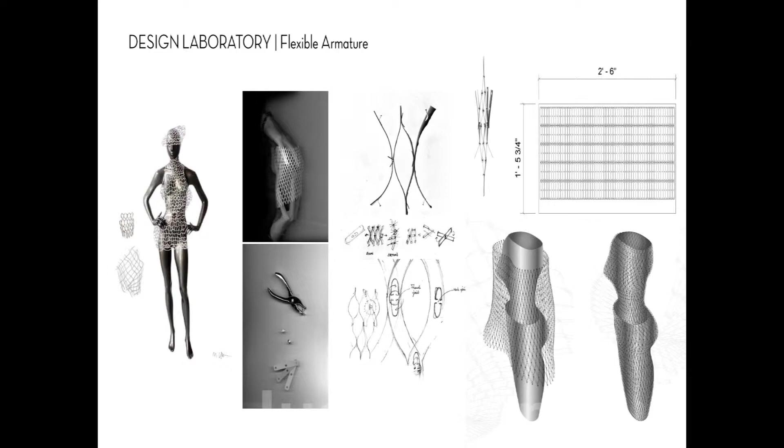Recently, we worked on a flexible armature project in which we took the idea of flexibility in which skin can be readapted to different human body sizes. And it was featured in a fashion show where different models tried on different dresses, and it still maintained the same aesthetic appeal.

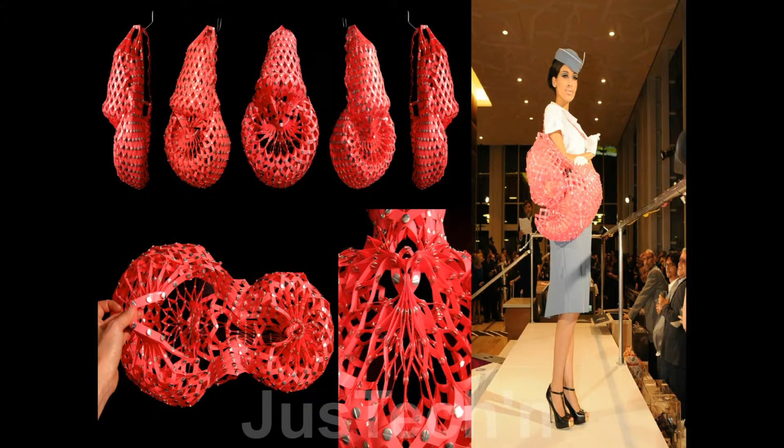With the success of the dress, we were asked to design a travel sack. And normally when you travel, you carry multiple bags, but with this sack, we were able to contract and expand to different needs of the project.

All of that was scripted and put into an algorithm, as you see up there, and produced a result that went through several iterative processes. The end result is what you see up here, which is a cultural motif in which we mutated and distorted to provide an interesting array of ideas.

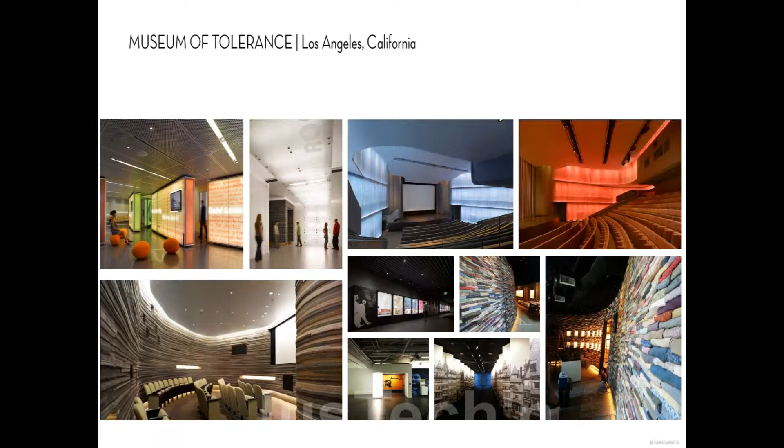At a much smaller level, we took the same idea of patterning using simple materials such as felt and articles of clothing for this exhibit at the Museum of Tolerance for Anne Frank.

And then for another project where we took the idea of flexibility and turned this curved glass wall that can be reconfigured to any size depending on the users and demonstration purposes.

The project I'm going to be talking about in more detail is called CJ Only One Research and Development Center. For those of you that don't know, CJ is one of the largest conglomerates in Korea. They're leaders in entertainment, and they actually hold majority stake in DreamWorks.

They're also leaders in food, biotech, and pharmaceuticals. We were asked by the client to create a large single complex in which three divisions, biotech, healthcare, and food, would be located in one location. They all wanted to move from different parts of the country to a single location where creative collisions could occur. We achieved this by creating three different unique towers brought together by a single atrium with collaborative roof gardens and landscapes that tie them together, creating a space for informal conversations and ideas.

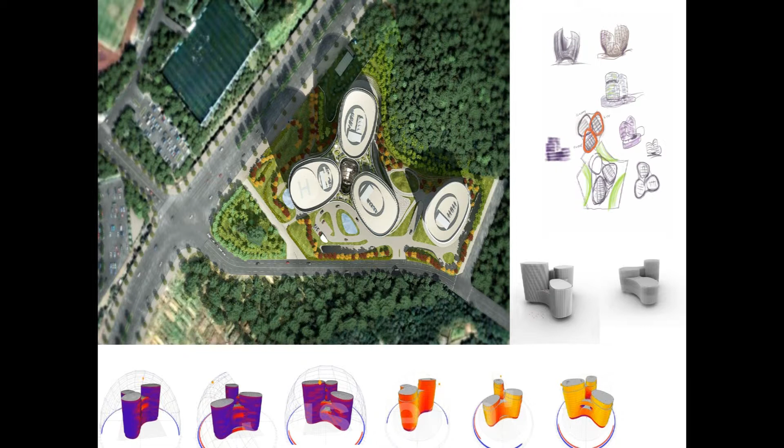So as I mentioned, the three towers represent biotech, food, and pharma. We never really intended it to look like the logo, but through the process we were inspired by it. At the same time, we had to rigorously test whether the idea was valid. You can see at the bottom the skin being exposed to solar elements, providing shade and performance to the building.

On the outside, when these creative collisions are occurring, the aperture of the facade actually opens up. So from the exterior, when you see these openings, that means there's a meeting room, conference room, or some type of collaborative space occurring.

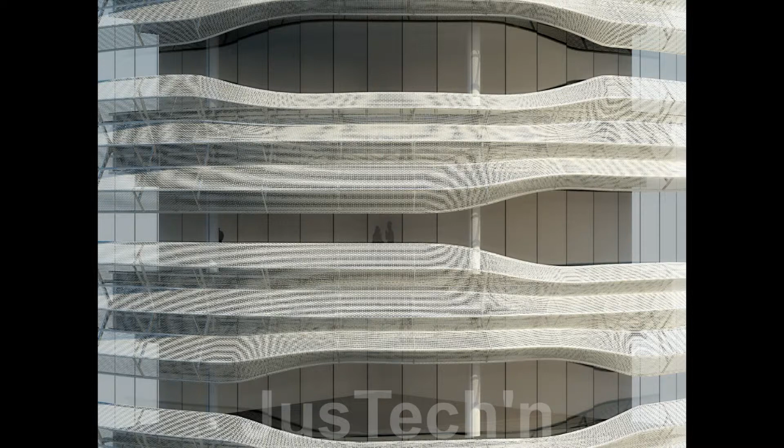Looking at it in more detail, the perforations you see in the facade actually change depending on orientation and sight lines. So if it's on the north facade, the perforation sizes change. The result is a panoramic view without any mullions, giving a clear sight of what they're doing, what they're seeing, and what to be inspired by.

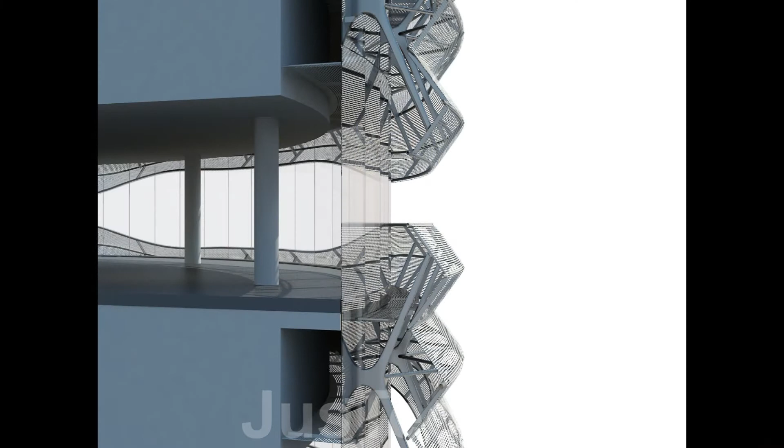We achieved this by creating a special strong-back system in the ceiling, which allows us to span between the columns without any mullions and have clear glass. None of this would have been possible without tools like HP Workstations in our daily process.

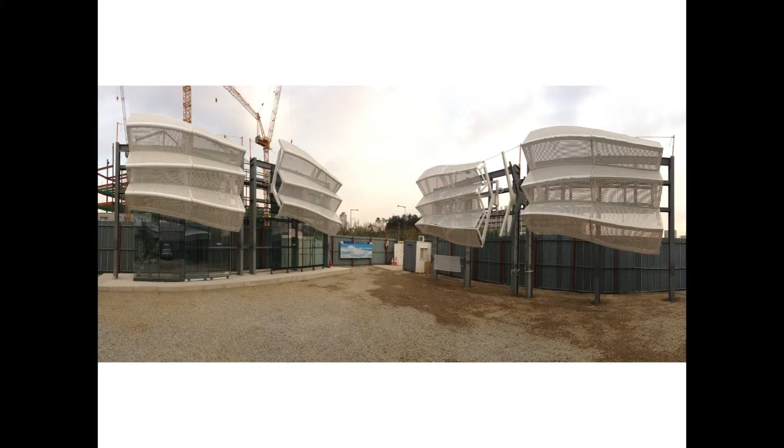We've gone through several iterations, going from one workshop to the other, showing different processes and ways of presenting this model. The result is these four mock-ups that were done recently. Having done a lot of studies and tests ahead of time, we're able to virtually mock up the entire thing digitally and test how it fits on the site.

Unfortunately, unlike a digital world where everything fits in perfectly, what you don't see here is there's a guy behind that screen hammering things, because in real life things never work out as perfectly, like my mic. And this is the final piece, the context.

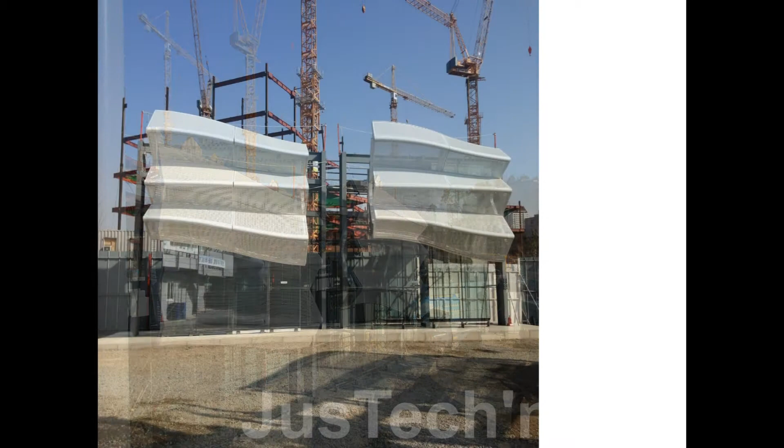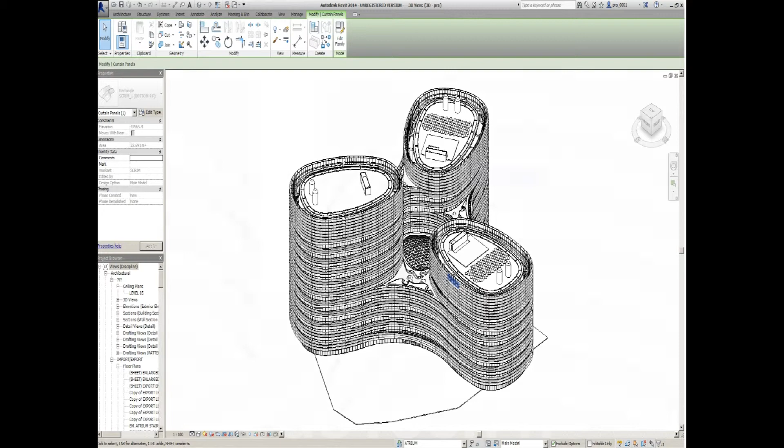So I mentioned earlier about SIFMO, and since we have teams from Chicago who is focused on corporate identity, our team in San Francisco focused on laboratory, and our New York office, LA office, Shanghai office all working on this project, we have an enormous amount of data that needs to be shared among our team members in real time. Just to give you an idea, every one of those single panels that you see in this facade has been modeled, tagged, identified, so that we know in real time how much this thing costs, how it's assembled, where it goes, and so on.

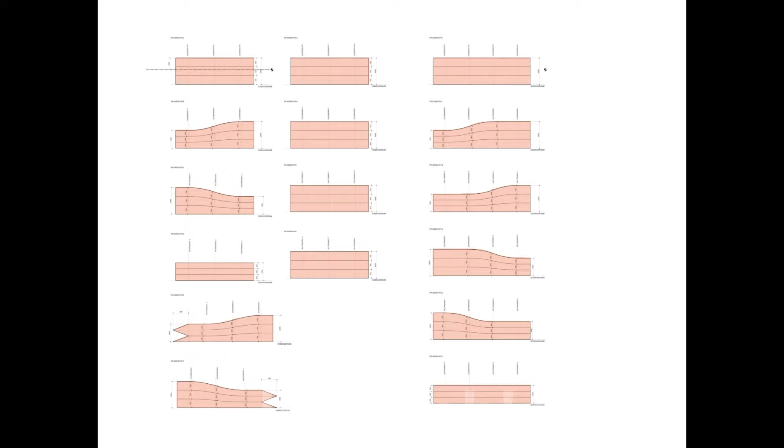It gets even more detailed because the panels get flattened out and shown how these pieces are going to be cut out and placed in order. We use programs like Inventor, which require a lot of RAM and real-time hardware graphics for looking at every little detail of the facade and how every component comes together.

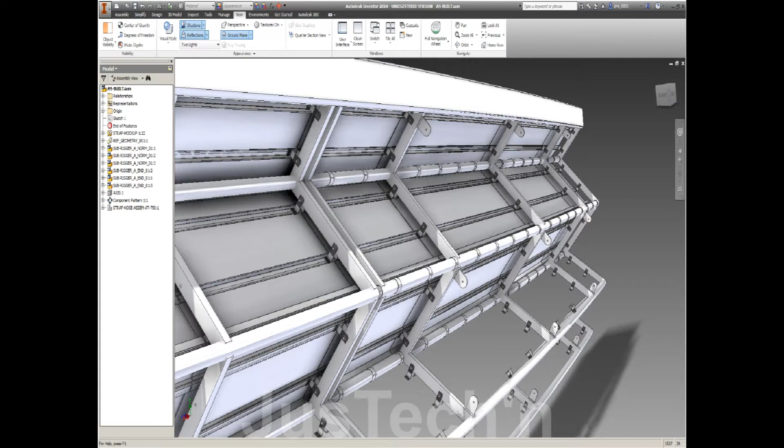We make real decisions like this in workshops where we bring our workstations and show the consequences of certain design changes that occur in these workshops. Every armature that attaches to the building is tested and looked at. We even build our own physical models to test how things come together so we can share with our fabricators and contractors how things come together.

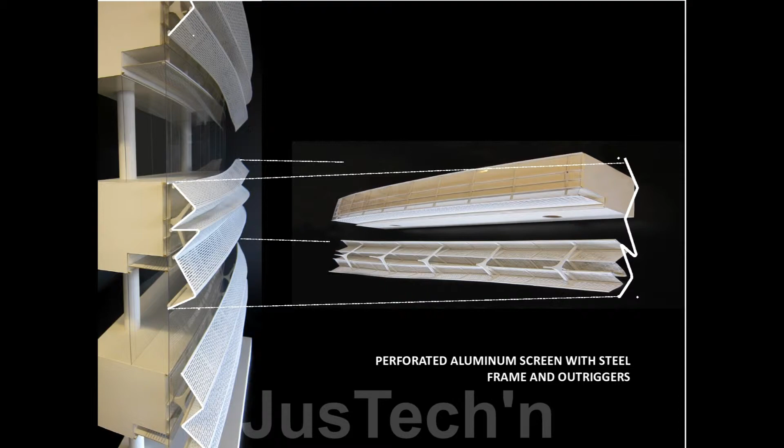So this is one module that gets put onto a building, but we took the same rigorous steps to show this in real time with our clients using a physical model.

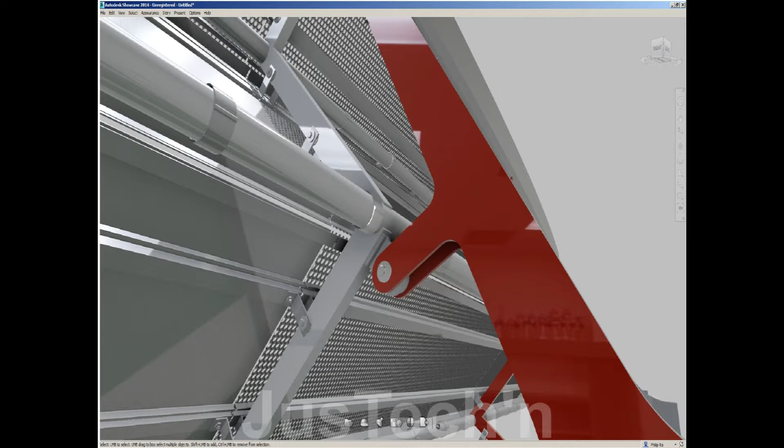During one of the workshops, there was a question about the cost to actually cut and weld one of these outriggers, and the time that it would take. They asked, what if you were to plasma cut a single piece of steel that's about this thick? Normally that's not the right thing to do because of cost, but because of time and efficiency, we looked at it to see if it was even possible.

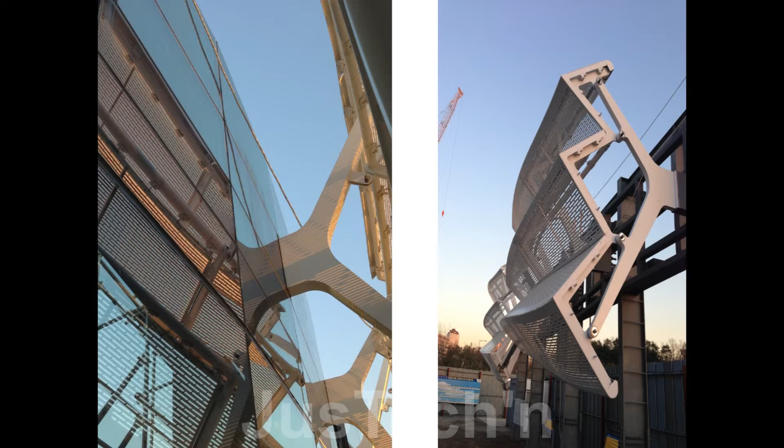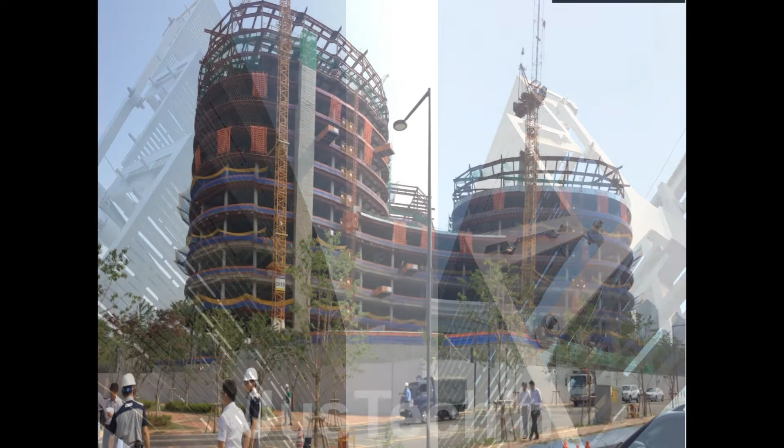That's why we had to do these iterations in real time, both internally and with our clients. Here you see the final product. You can see the transition from digital model to physical reality is very seamless, and doing this as much as possible in the digital world lets us achieve where we are today.

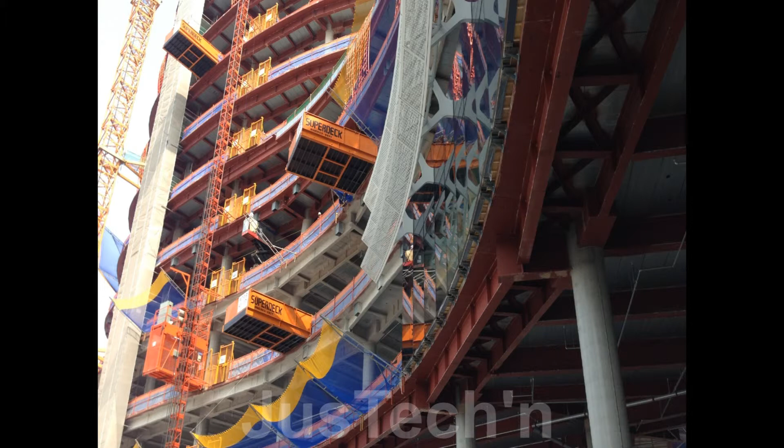This is a more recent photo of the building topped out, and this is the screen module that's fitted onto the building. Just to give you an idea of the size, this segment is about 65 feet long, curved in 2 directions, with perforations going in a complex curve, and it weighs about 10,000 pounds - about the weight of 2 SUVs hanging on the wall. We need over 600 of these pieces.

On a daily basis, the fabricators will be creating 2 panels like this and shipping them to the site in the middle of the night, putting them up each day. So for 1 year, they're going to be putting this up, and we have to make sure that everything that goes up is done correctly.

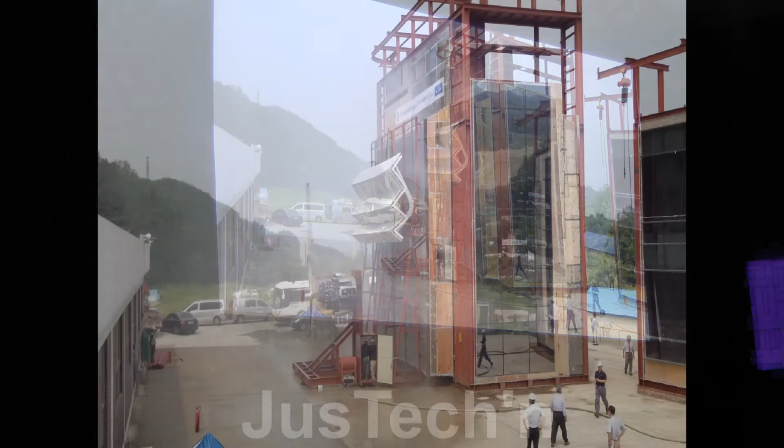In addition to getting things done correctly, we've done tests - this is a performance test where we did the test digitally, going through different stresses and wind loads. But like I said, you had the guy hammering at the last minute - we have to test it to see if it actually works. This was done recently and successfully, so we are very proud of the end result of this test.

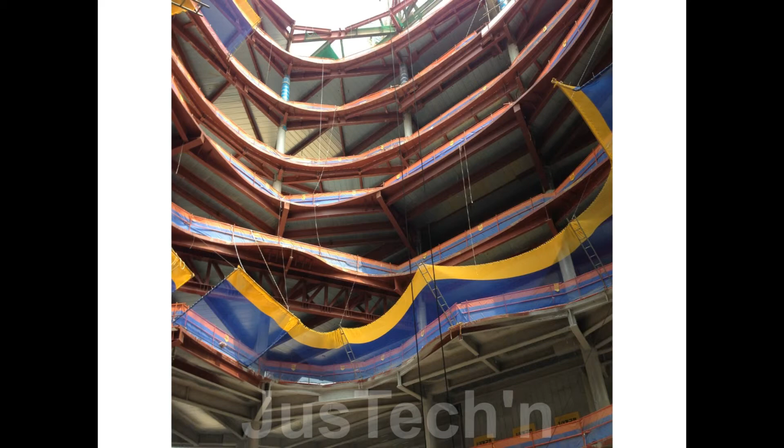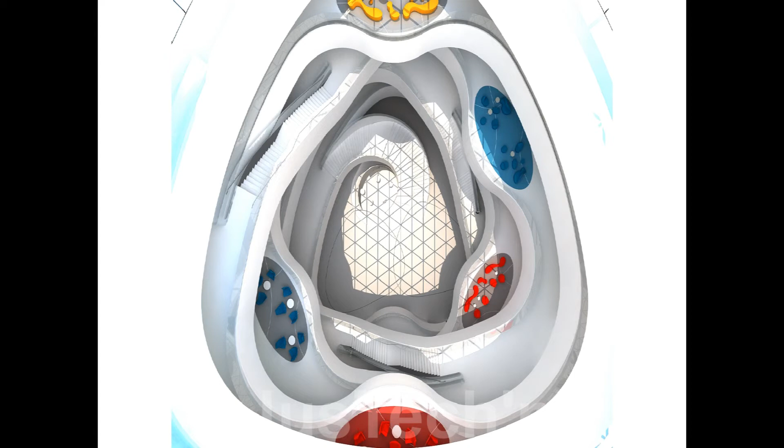This is the atrium lobby, and this is the conceptual idea that ties to it. This is the atrium looking down, so those collaborative spaces, the bulges that you saw at the bottom, are these meeting points throughout the space.

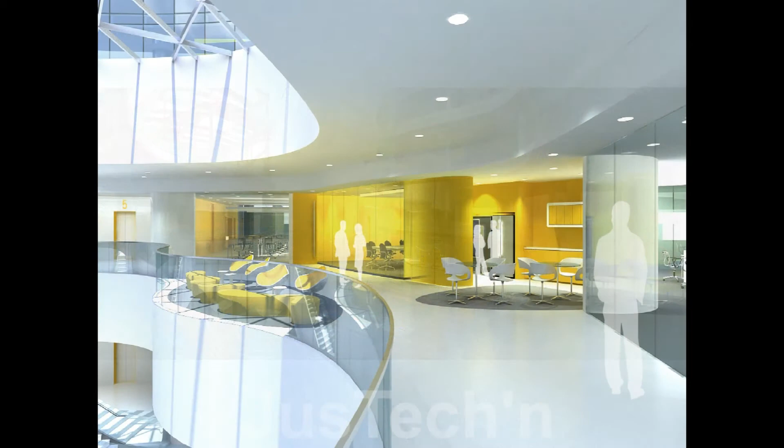This is a roof garden that ties the different collaborative spaces together. Just below that, you have these collision spaces, lounges, meeting rooms. And inside the research lab, you have what we call the new science of workplace, in which we bring together collaborative spaces as part of the working environment.

And then when you need some quiet time to think, these are placed around the building so that people can take a moment to breathe and come up with ideas. Also, when we have enclosed labs, we try to create these undulations to make it look less like a corridor and more like a free-flowing space.

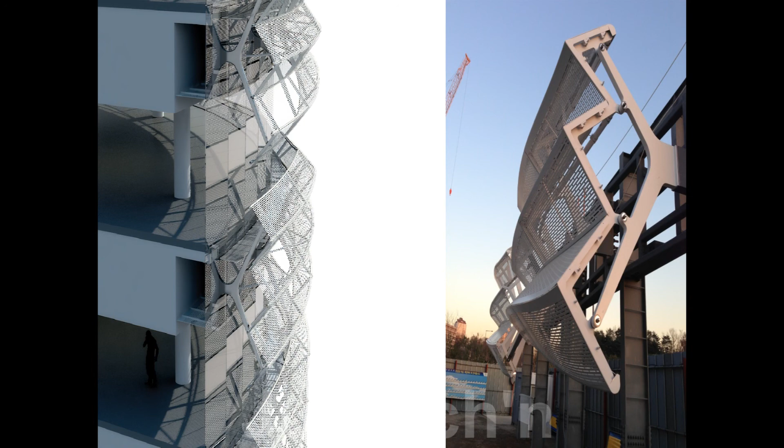So in conclusion, the way we explore, design, and push the boundaries of design, using HP Workstation as part of our daily process - communicating, collaborating, and creating - lets us transition smoothly from the digital world seamlessly to the physical world without any conflicts, making it all possible. Thank you very much.